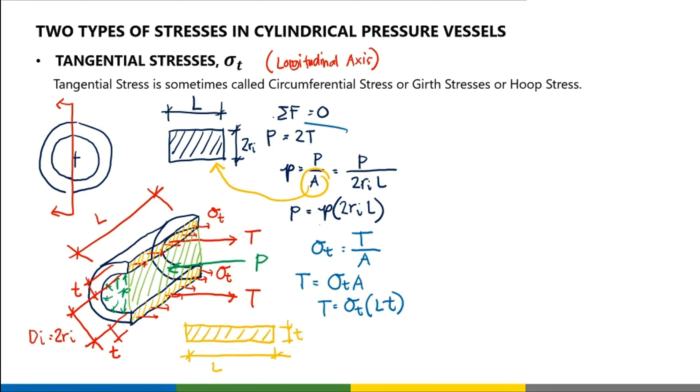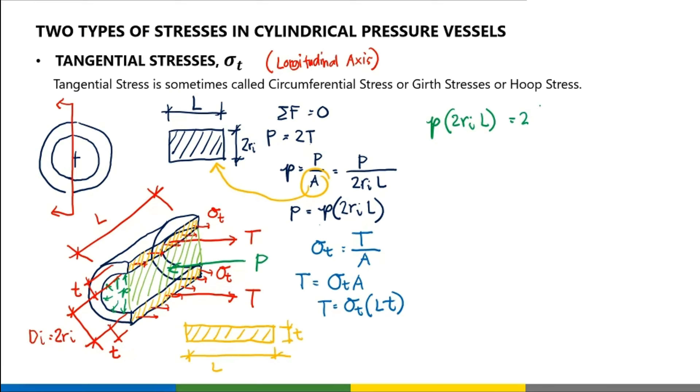So meron na tayong value ni T. So balik tayo dito. Summation forces, we can say that P is equal to twice ng T. Substitute natin yung value ni P, which is equal to pressure multiplied by 2Ri multiplied by length L, is equal to twice ng T, 2 multiplied by tangential stress multiplied by length times thickness.

So makakancel yung 2, makakancel yung length L, at ang natira na lang ay yung tangential stress at yung thickness dito. Ilipat natin yung thickness sa kabila. We can say that tangential stress is equal to internal pressure, may natirang inner radius doon, inner radius divided by T. So that is now our formula in getting our tangential stress.

Where small letter P is the internal pressure sa ating tank, yung ating Ri, that is the inner radius, at yung T is the vessel thickness. So yan ngayon yung formula natin in getting our tangential stress doon sa ating cylindrical pressure vessel na nag-fail doon sa ating longitudinal axis.

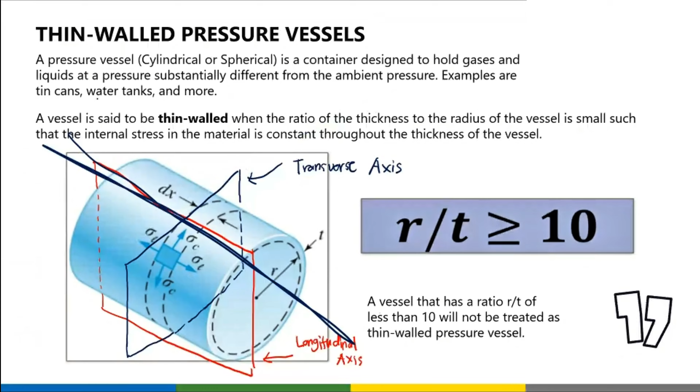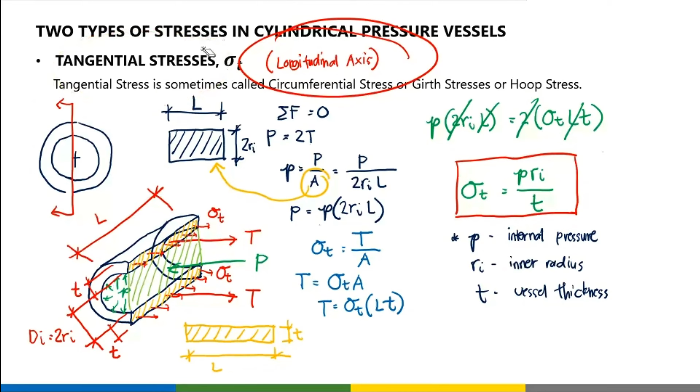Sabi natin pwedeng mag-fail yung ating cylindrical pressure vessel in longitudinal axis at pwede rin sa ating transverse axis. Sa ating transverse axis, ang present na stress doon ay tinatawag nating longitudinal stress. Hindi ibig sabihin, huwag kayong malilito guys, kapag sa longitudinal axis ang napoproduce na stress ay tangential stress. Magkaiba yung longitudinal axis sa longitudinal stress. Dito sa ating longitudinal stress, nag-fail siya sa ating transverse axis, kaya ito ay longitudinal stress.

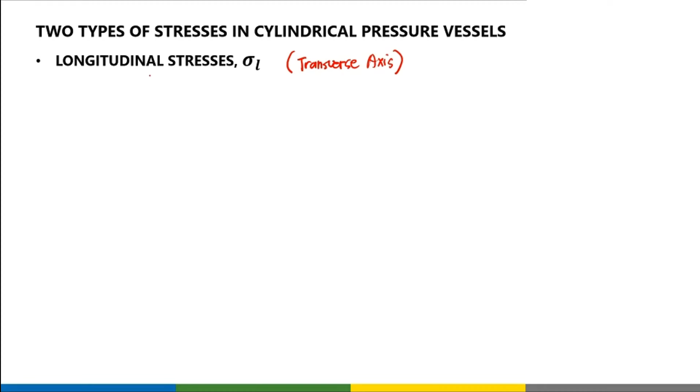Paano naman nangyari yon? Sabi natin, di ba, pwedeng mag-fail dito na part. So ganito naman nangyari yan.

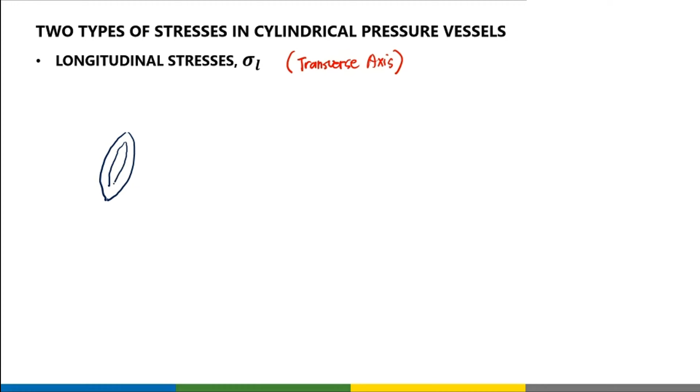Okay, so let's say ganito guys, yung nangyari sa ating pressure vessel, nagkaroon ng contact pressure dito banda, nagkaroon ng pressure dito sa part na to. Kung mapapansin nyo guys, nakadirect yung mga stresses natin sa ating longitudinal axis. So ibig sabihin, kaya tinawag nating longitudinal stress, which is nag-fail siya sa ating transverse axis.

So ito yung mga stresses, these are the longitudinal stresses. So yung area na i-consider natin ngayon ay itong area na to, yan, yung shaded part na yellow.

Okay, so kung meron tayong na-produce dyan na stress and meron tayong naapektuhan na area, may mapuproduce ulit tayong force. Tawagin natin to as force F.

Okay, next, meron tayong internal pressure ulit. Diba sabi natin meron tayong internal pressure sa loob ng tank, so yun yung ating small letter P. So makakapag-produce ulit tayo, so pwede ring mag-fail.

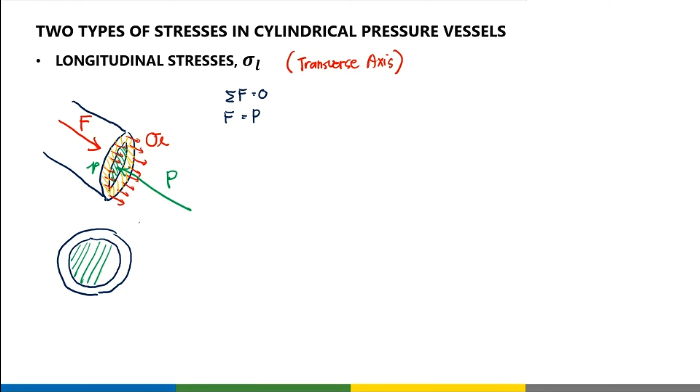Yung nasa loob, okay? So this is the diameter, or twice ng inner radius. Okay, so kung kukunin natin yung area niyan, diba ito lang yun naman, yung shaded part naman nasa loob. So we can say that area ng circle in terms of radius, that is pi r squared.

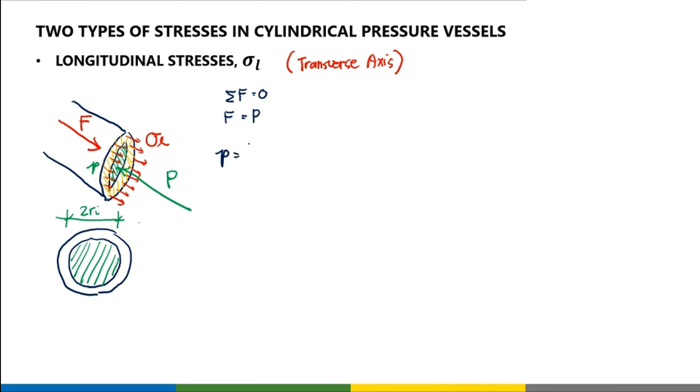Okay, so internal pressure, P equal to P divided by area. Yung area na i-consider natin ay yung shaded part na nasa loob. Substitute natin, P divided by pi r squared in terms of radius na lang guys. Pi r squared. So cross multiply natin, we can say that force P is equal to internal pressure multiplied by pi r squared. So meron na tayong force P.

Kunin naman natin yung force F. Force F is caused by our longitudinal stress. So kung titingnan din naman natin yung naapektuhang area dito sa ating longitudinal stress ay ito. Kung i-cut natin to ulit, ilatag natin, so magiging parang rectangle ulit siya. So ganito siya.

So this is the thickness of our pressure vessel, ito guys. That is the thickness. Ano naman yung base natin dito? Yung base natin dito, yun yung circumference ng ating circle, that is in terms of radius, that is 2 pi r, or in terms of diameter, that is pi d. So radius na lang yung gamitin natin. Ito yung area na i-consider natin.

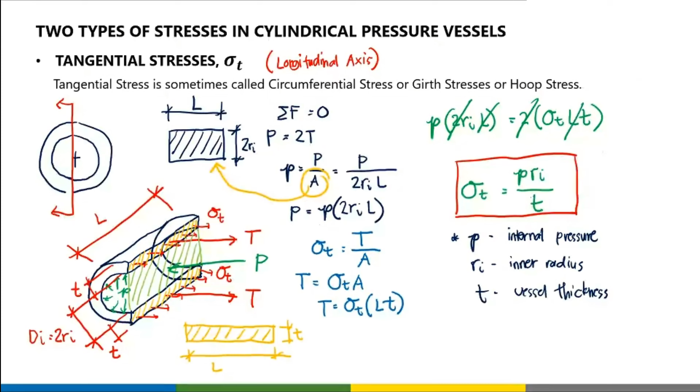Okay, so this is our formula in getting our stresses in cylindrical pressure vessels. Kung mapapansin nyo guys, yung longitudinal stress natin ay may 2, sa tangential naman wala. So ibig sabihin, yung relationship ng longitudinal and tangential stress, kung nagkaroon lang ng 2 dito sa tangential stress nung kinukuha natin yung longitudinal stress, we can say that longitudinal stress is just half ng tangential stress. Or cross-multiply natin, we can say that tangential stress is equal to twice ng longitudinal stress. Given that equation, we can say that tangential stress is greater than longitudinal stress.

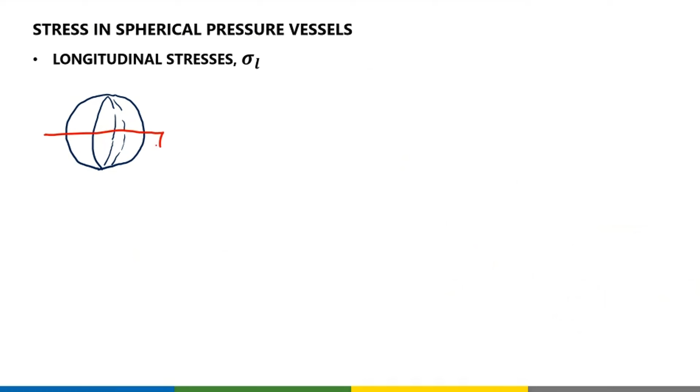Okay, paano naman sa ating spherical pressure vessel? Isa lang yung way na pwede siyang mag-fail kasi anywhere, or kahit anong direction, same lang din naman yung mapapalabas natin na stress sa ating sphere, if this is our sphere. So yung sphere natin pwedeng mag-fail sa ganitong direction, ganitong direction, ganitong direction. So i-try nating i-consider yung ganitong part. Same lang din guys, kasi sphere naman yan, anywhere magiging circle din lang. So nag-fail siya pa ganyan, ganito naman nangyari sa kanya.

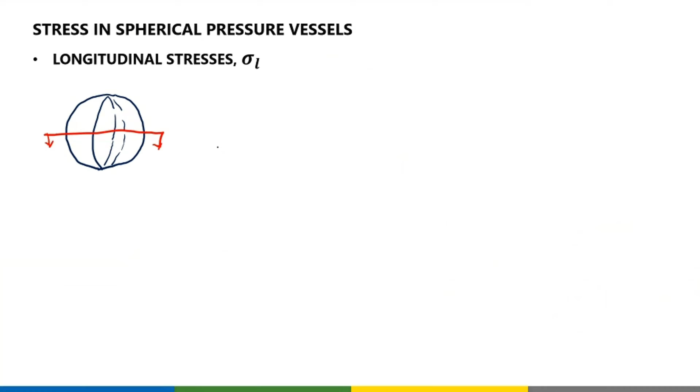Okay, so let's say ganyan yung pagkakahati, so we have stresses ulit dito. Ito ngayon yung tinatawag nating longitudinal stresses, and nag-occur yan dito sa part na to, sa shaded part na yellow.

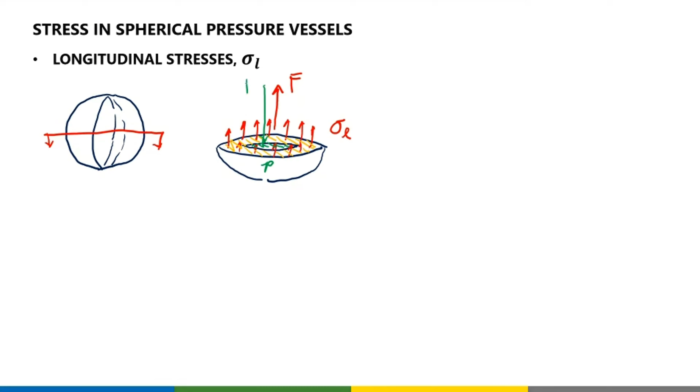So kung meron tayong na-produce na stress and meron tayong affected area, meron tayong produce na force T, or let's say sabihin natin force F na lang. And meron ulit, meron tayong internal pressure sa loob ng pressure vessel, so meron ulit tayong mapuproduce na force caused by our internal pressure, tawagin natin to as force P ulit. Okay, so summation forces ulit, we can say that force P is equal to force F. So dito muna tayo sa force F that is caused by the longitudinal stress.

So parang ganun lang sa longitudinal stress natin sa ating cylindrical pressure vessel. Mag-cut ulit tayo dito, ilatag natin yan, magiging ganito yung itsura niya. Diba meron pa rin tayong thickness? May thickness pa rin tayo. So that is the thickness of our area of our sphere. Yung base niya ngayon, that is the circumference of our circle, that is 2 pi inner radius. Okay, so yung area na i-consider natin sa longitudinal stress ay ito ulit.

Sabi natin, longitudinal stress is equal to force F divided by area. Substitute natin yung area, that is 2 pi inner radius multiplied by thickness. So cross-multiply natin, we can say that F is equal now to longitudinal stress multiplied by 2 pi Ri times thickness. Okay, so meron na tayong force F. Ano naman yung force P natin?

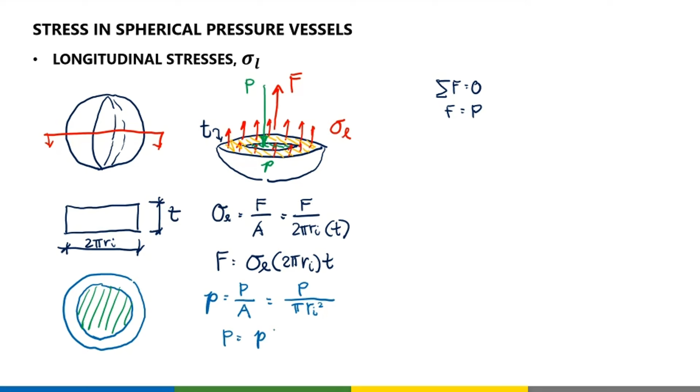Just like in our cylinder, ganun din guys, ito pa rin yung area na i-consider natin, yung inner area, itong area na to. Okay, so force P that is caused by the internal pressure. Internal pressure is equal now to force P divided by area, substitute natin yung area, pi R squared na lang guys. So force P will now be equal to pressure multiplied by pi Ri squared.

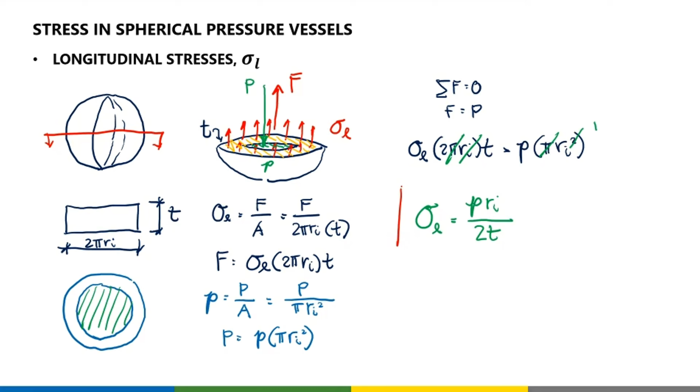Okay, meron na tayong force F, meron na tayong force P. Then we can now substitute that in our F is equal to P. So yung F natin ay longitudinal stress multiplied by 2 pi Ri multiplied by thickness. Then yung P natin ngayon ay internal pressure multiplied by pi multiplied by Ri squared. Mapapansin ninyo, cancelled yung pi, cancelled yung isang inner radius, may natirang isa dito. So yung formula natin, longitudinal stress, ilipat natin yung 2t sa kabila, meron tayong formula na longitudinal stress is equal now to internal pressure multiplied by inner radius divided by 2t. And that will be our formula in terms of longitudinal stress sa ating spherical pressure vessel.

So mapapansin nyo, same lang yung formula natin dito sa longitudinal stress in terms of cylindrical pressure vessel. Okay, this is still PRi over 2T, where P is the internal pressure, Ri is the inner radius, and T is the vessel thickness.

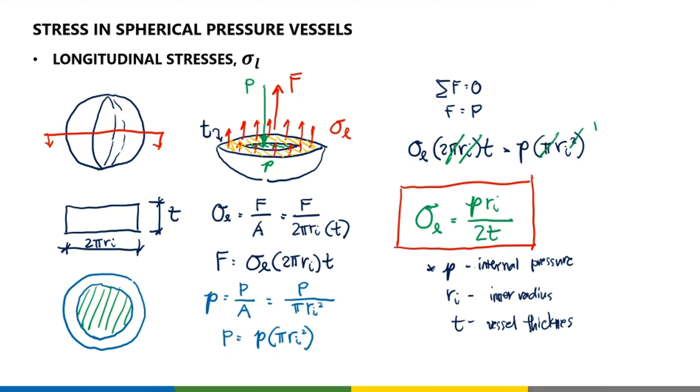Okay, so i-apply na natin yan ngayon sa ating problem. For our first problem: a cylindrical steel pressure vessel has hemispherical end caps. The inner radius of the vessel is 24 inches and the wall thickness is constant at 0.25 inch. When the vessel is pressurized to 125 PSI, determine the stresses in the cylinder. So pinapahanap yung stresses dito sa ating cylindrical pressure vessel.

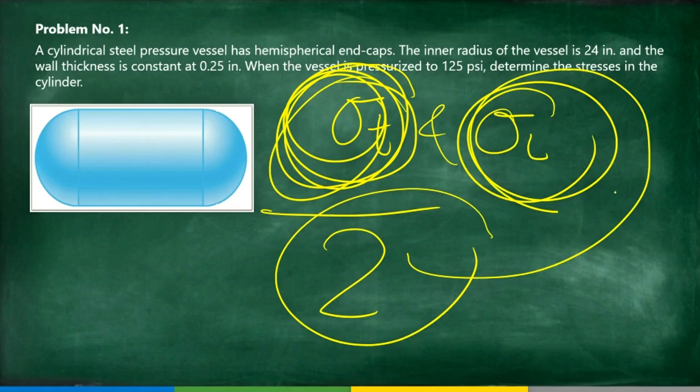Sabi natin kanina sa cylindrical pressure vessel, dalawa yung present na stresses natin doon, namely tangential stress and longitudinal stress. And sabi din natin kanina na yung longitudinal stress ay just half ng tangential stress. So therefore, pwede na lang nating isolve yung tangential stress and later on, i-divide natin sa 2, makukuha na natin yung longitudinal stress. Okay, so kunin natin ngayon yung tangential stress. Sabi natin, tangential stress is equal to PR over T.

PRi over T. Okay, let's put our given values. We have inner radius which is equal to 24 inches, wall thickness that is 0.25 inch, and our internal pressure that is equal to 125 PSI. We need to find the tangential and longitudinal stress.

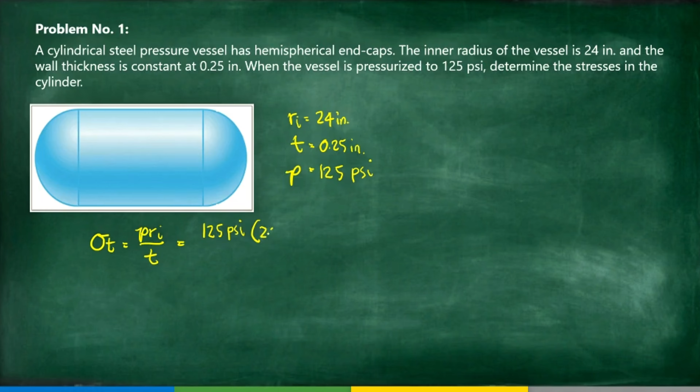Let's get first our tangential stress and later on divide it by 2 to get our longitudinal stress. Substitute the internal pressure that is 125 PSI, our inner radius that is 24 inches, and our thickness that is 0.25 inch. Cancel the inches, and therefore our tangential stress will now be equal to...

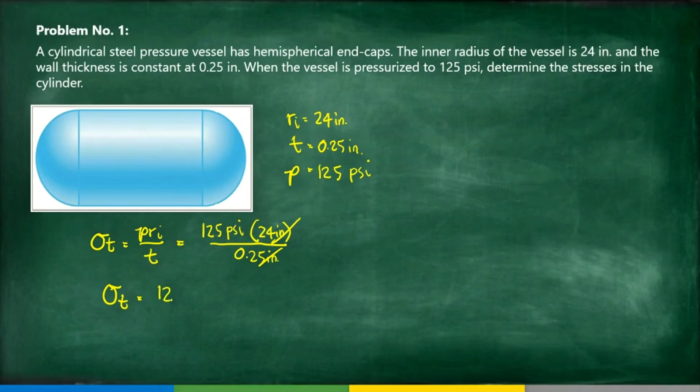And this is now our answer.

Okay, we said earlier that longitudinal stress is just half of our tangential stress. So let's get this, substitute our tangential stress. So tangential stress is 12,000 divided by 2. Therefore, our longitudinal stress will now be equal to 6,000. So it's that easy.

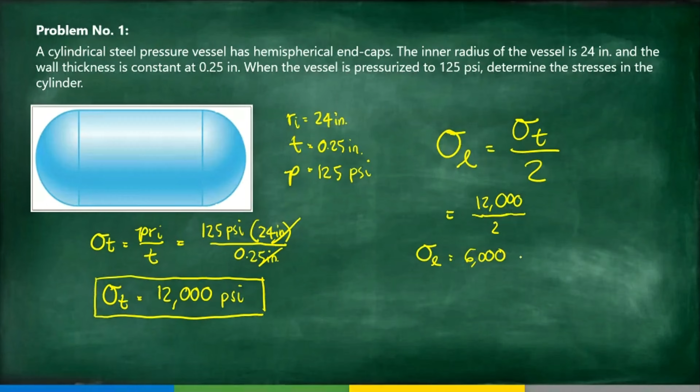Longitudinal stress is 6,000 PSI. Let's have another example.

The scuba tank has a cylindrical body and a spherical end cap, each of 7.5 inches outer diameter. The wall thickness of the tank is 0.5 inch. The tank is made of an aluminum alloy which has an ultimate tensile strength of 56 kilopound per square inch. Determine the factor of safety against bursting when the tank is pressurized to 3,000 psi.

What we need to find is the factor of safety. To find the factor of safety, we have the given formula: ultimate strength or ultimate stress divided by maximum actual stress. Our ultimate strength, we already have it given, the ultimate tensile strength that is 56 KSI. That has already been determined through different laboratory tests, so we can say there's nothing else we need to do there - that is the strength of our scuba tank.

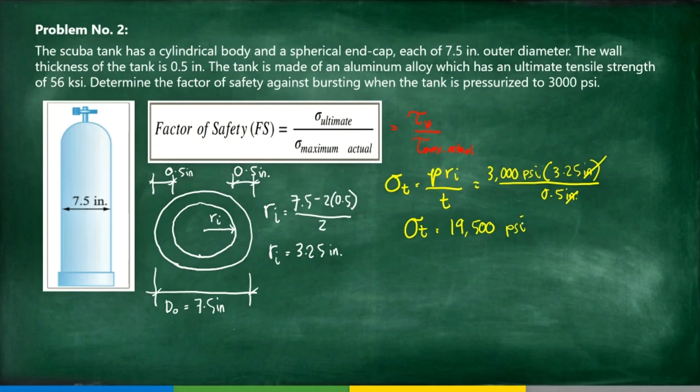Sabi natin na tangential stress nakaka-experience ng maximum stresses and therefore this will be our maximum actual stress. Kung meron na tayong maximum actual, meron na rin tayong ultimate and therefore we can now compute for our factor of safety.

Guys, para masabi natin na yung scuba tank or yung material natin, in general, ay safe, dapat yung factor of safety natin should be greater than 1 para masabi nating safe tayo. Less than 1, ibig sabihin mag-fail na yung ating material. Kapag nag-equal to 1, we are endangered na, konti na lang mag-fail na. So dapat ang goal natin, mapalabas natin na yung factor of safety should be greater than 1 para masabi natin na safe yung ating scuba tank.

Okay, isolve natin yung ating factor of safety. Factor of safety is equal to ultimate divided by maximum actual. Pero guys, yung given natin for ultimate tensile strength ay in terms of KSI, that is kilopound per square inches. And yung ating maximum actual is in terms of pound per square inches. Alam natin na in 1 kilopound, there are 1,000 pound, so pwede nating i-convert yung KSI into PSI by multiplying 1,000, or pwede ring PSI into KSI. So i-convert natin yung KSI into PSI: 56 KSI in terms of pound per square inches, i-times lang natin sa 1,000, so that will be equal to 56,000 PSI na.

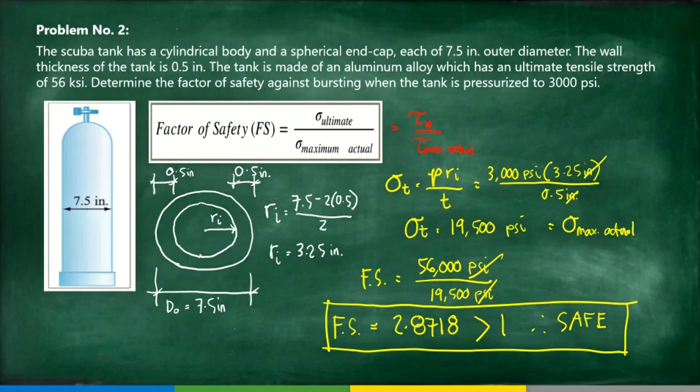Okay, another example for our pressure vessel: a water tank that is 8 meters in diameter and 12 meters high. If the tank is to be completely filled with water, determine the minimum thickness of the tank planting if the stress is limited to 40 megapascal.

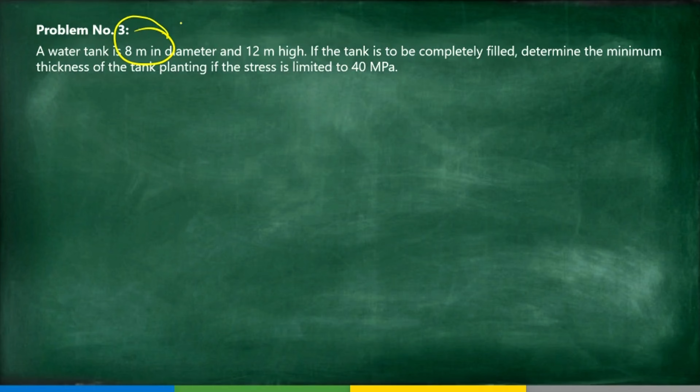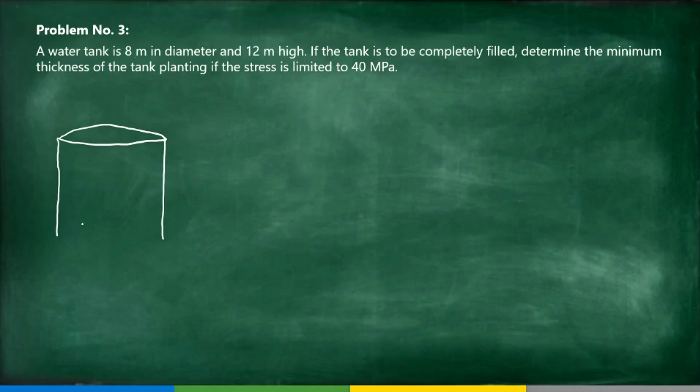Okay, meron tayo ditong 8 meters in diameter. We do not know if that is inner diameter or outer diameter. Kung hindi sinabi whether that is inner or outer diameter, always assume na yung given ay inner diameter. So ganito yung nangyari sa atin: meron daw tayong water tank that is 8 meters inner diameter and 12 meters high. Hindi sinabi guys, no, either inner or outer, always assume that is inner diameter, 8 meters.

Okay, so yan yung ating water tank. Meron daw tayong inner diameter which is equal to 8 meters. Meron tayong thickness dito, T. Ang dinidesign daw natin ay kailangan nating malaman yung minimum thickness. That is 12 meters high. And meron tayong limited stress or the working stress that is equal to 40 megapascal, or that is also maximum stress that is 40 megapascal. I-design daw natin yung tank, o kailangan nating malaman kung ano yung pinakamanipis na thickness na pwedeng i-cater o pwedeng maging property ng ating tank, which is safe pa rin tayo guys.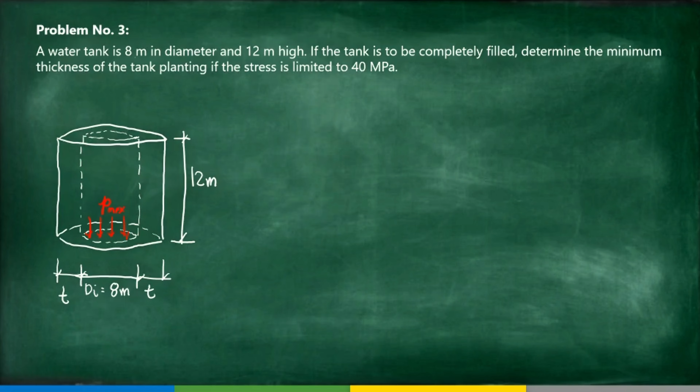So therefore, dito sa ating water tank, kung i-consider natin yung maximum pressure natin ay matatagpuan sa pinakamababang parte ng ating tank. Okay?

So para makuha natin yung pressure, meron tayong formula. I will give you formula para mahanap yung ating pressure. That is pressure is equal to unit weight ng liquid, unit weight or specific weight ng liquid multiplied by height. Okay? So yan yung ating formula for pressure. Unit weight ng liquid, kung ano yung present dito, and yung height ay always measured from the liquid surface.

Kung i-consider natin yung maximum pressure dito, maximum pressure ay equal to unit weight ng kung ano yung liquid dito, that is unit weight ng water, kasi water nga yung laman ng ating tank. And ano naman yung height na i-consider natin? Yung height ay always measured from the liquid surface. Sabi natin na yung tank ay completely filled. So andito ngayon yung liquid surface natin papunta dito. So yung height na i-consider natin ay 12 meters.

What if, tinanong ko sa inyo, what is the maximum pressure kung meron tayong tank na hindi completely filled. So this is our big H, this is our small h. Pinapahanap sa atin yung maximum pressure. Maximum pressure is unit weight multiplied by H. Unit weight is kung ano yung liquid dito. And yung height na i-consider natin, sabi natin, always measured from our liquid surface. Therefore, hindi natin i-consider yung big H kasi wala namang liquid dyan. Kaya ang i-consider natin ay mag-start tayo dito sa bandang liquid surface papunta sa pinakamababang parte na i-consider natin. So that is small letter h, hindi big letter H.

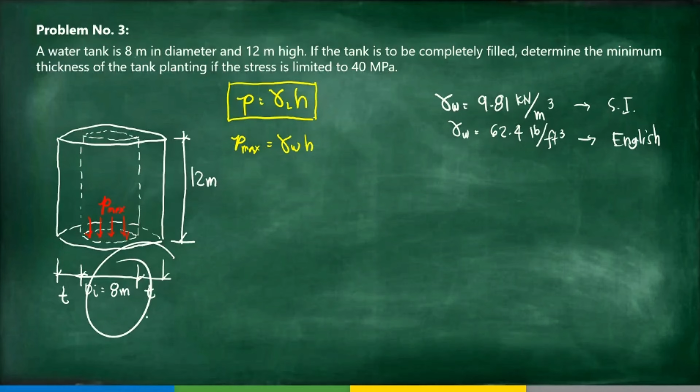Okay? So dahil in terms of SI tayo kasi yung magamit natin ay in terms of meters and Newton and megapascal, that is in System International, okay? So kung System International yung ginagamit natin or SI, gamitin natin na value ni unit weight ng water that is equal to 9.81 kilonewton per cubic meter.

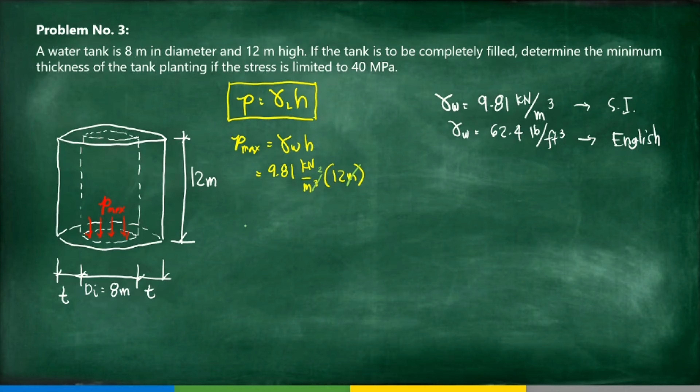So kunin natin yung ating maximum pressure. Maximum pressure, that is unit weight ng water, 9.81 kilonewton per cubic meter, and yung height na i-consider natin ngayon ay 12 meters. Okay? So cancel yung isang meter, so may natirang dalawa na lang dito, guys. So therefore, our maximum pressure will now be equal to 117.72 kilonewton per square meter.

So this is actually kilopascal. Pero ang gusto natin in terms of megapascal para uniform yung ating unit. So i-convert natin tong kilopascal into megapascal. 117.72 kilonewton per square meter. Sabi natin in 1 kilonewton there are 1,000 newtons. And in 1 meter, guys, kung nasa taas kung nasa numerator yung kailangan nating i-cancel, dapat yung i-multiply natin nasa denominator siya para ma-cancel sila, guys. So in 1 meter, there are 1,000 millimeters.

So dahil naka-square to, i-square din natin to. So makakancel yung kilonewton, makakancel na rin yung square meter, magiging square millimeter. So ang matitira na lang ay Newton per square millimeter. And therefore, our maximum pressure in terms of megapascal ay equal to, that will be equal to 0.11772 megapascal or Newton per square millimeter or megapascal. Okay? Meron na tayong maximum pressure.

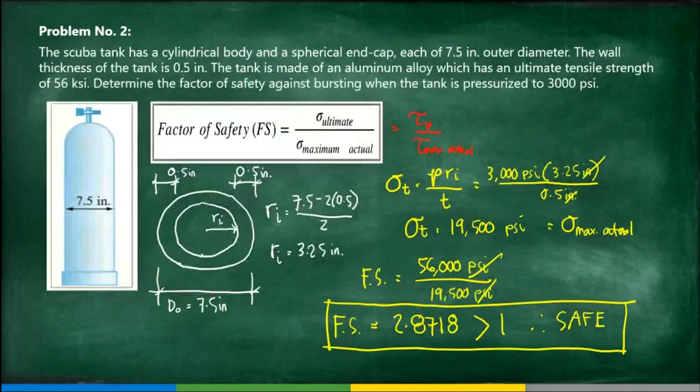Okay? Sabi natin na yung tank ay nakaka-experience ng tangential and longitudinal stress and therefore sa ating tangential may maibibigay siyang thickness and sa longitudinal meron din siyang pwedeng ibigay na thickness. Okay? So, okay, so wala pala. Dito kailangan nating malaman kung ano yung ibibigay na thickness ni tangential stress and yung ibibigay din ni longitudinal stress na thickness and therefore kung ano yung mag-govern doon, yun yung pipiliin natin as our minimum thickness. Okay? So kunin natin yung ating thickness given by tangential and longitudinal stress.

So yung ating 40 megapascal, substitute natin sa tangential and longitudinal. Maibibigay silang thickness na dalawa. Okay? So dito muna tayo sa ating tangential stress.

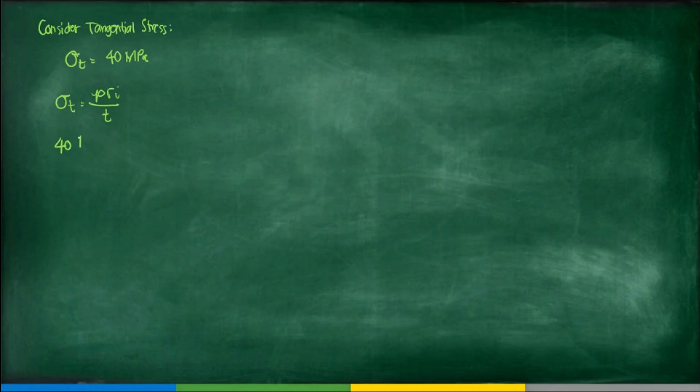So, equate natin na yung tangential stress natin ay equal to 40 megapascal. Formula natin for tangential stress, p r i over t. Substitute natin yung given natin, 40 megapascal. And yung maximum pressure natin, 0.11772 megapascal. 0.11772 megapascal. And yung inner radius natin,

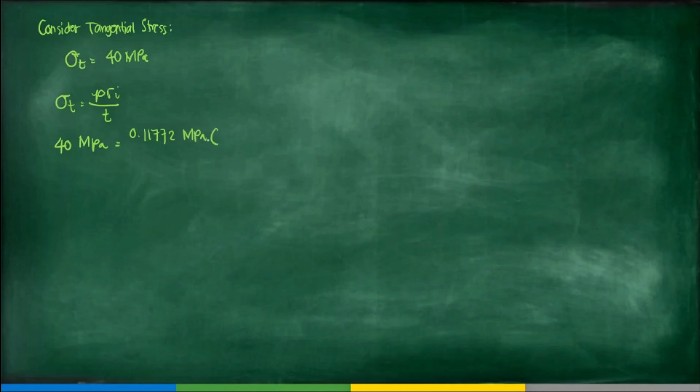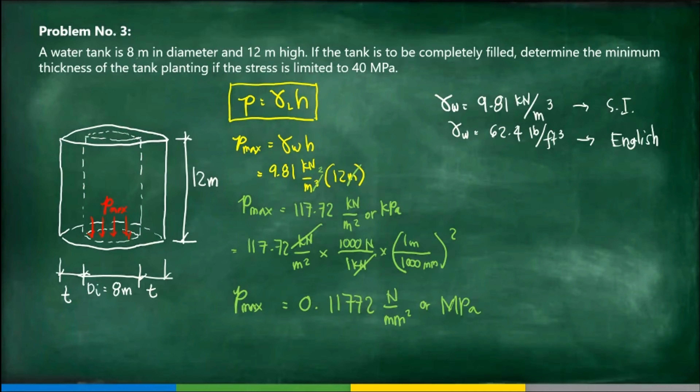Meron tayong inner diameter dito guys. Sabi natin na inner diameter ay twice ng ating inner radius. So para makuha natin yung inner radius, 8 divided by 2 or 4 meters. In terms of millimeters, magiging 4,000 millimeters na yung ating inner radius. 4,000 millimeters. Okay, divided by thickness. Cancel yung MPa, so meron tayong value na T in terms of tangential stress will now be equal to 11.772.

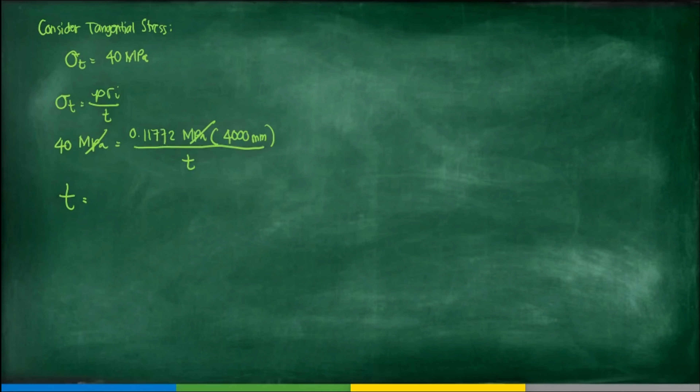So kung meron tayong 11.772 millimeters, ibig sabihin sa ating tangential stress, ang pinakamanipis na thickness na kaya niyang i-cater ay hanggang 11.772 na lang. Mas mababa ba dyan, mag-fail na yung ating material in terms of tangential stress and ayaw nating mangyari yon. So dapat hindi na tayo bababa sa 11.772.

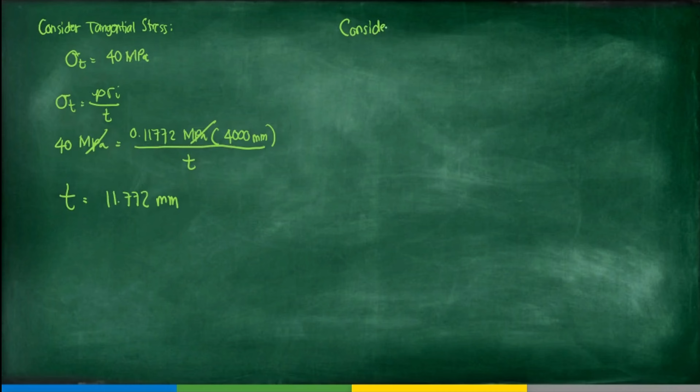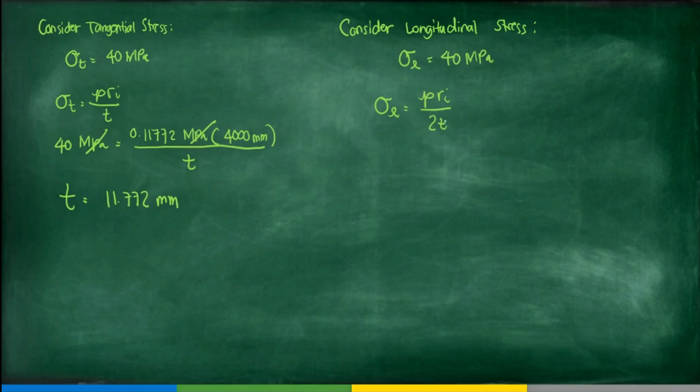Consider naman natin yung ating longitudinal stress. So for our longitudinal stress, i-equate ulit natin na yung longitudinal stress ay equal to 40 megapascal. Formula natin for longitudinal stress ay pri over 2T. Substitute natin 40 MPa. Yung ating internal pressure or maximum pressure is 0.11772 MPa. And yung inner radius natin ay 4,000 millimeters, I should say, divided by 2T. So cancel yung MPa.

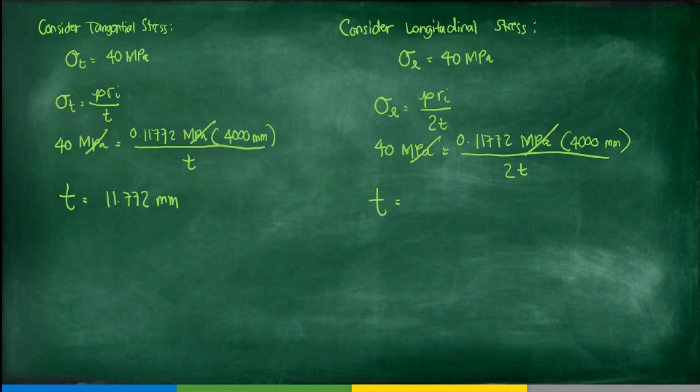So T will now be equal to 5.886 millimeters. Okay. Sa ating longitudinal stress, ang pinakamanipis pa lang kaya niyang i-cater ay hanggang 5.886. Mas mababa pa sa 5.886, bibigay na yung ating tank sa ating longitudinal stress.

Okay? Or doon sa ating transverse axis. Pero, kung i-consider natin as a whole, kasi iisang material lang naman ito, dapat kailangan nating mamili kung ano yung ating minimum thickness. Sabi natin kanina sa tangential stress, ito yung kanyang minimum thickness. Kung pipiliin natin tong 5.886 as our minimum thickness, safe tayo sa longitudinal stress. Kaso, mas mababa tayo sa tangential stress. And sabi natin hanggang 11.772 na lang yung kakayahan ni tangential stress. Ibig sabihin kapag pinili natin tong 5.886, bibigay na tayo sa ating tangential stress and therefore ayaw nating mangyari yon, kaya hindi natin pipiliin yung 5.886 and therefore our minimum thickness will now be equal to

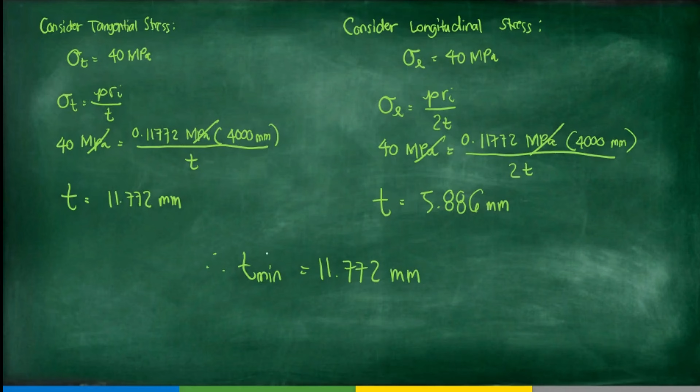11.772 kasi safe siya sa tangential stress as well as safe pa rin tayo sa longitudinal stress kasi hindi pa natin namimit yung pinakamanipis na thickness ni longitudinal stress. Therefore, our minimum thickness will now be equal to 11.772 millimeters. And this will be our answer. Okay? So yan na ngayon yung ating sagot.

Kung mapapansin nyo guys, kung maalala nyo yung logic natin from our discussion, from our previous discussions, kung ang pinipili natin ay minimum or kung ang pinipili natin ay maximum, ang hinahanap natin, kung ang hinahanap natin ay maximum, di ba ang pinipili natin ay least value? Okay? So therefore, kung ang pipiliin naman natin ay maximum or minimum, minimum, kung ang hinahanap natin ay minimum value, ang pipiliin natin ngayon ay the greater value. Okay? Tama nga naman, no? Kasi ang hinahanap natin ay minimum.

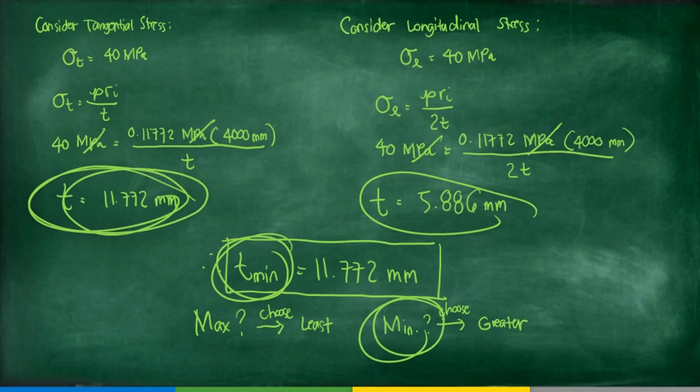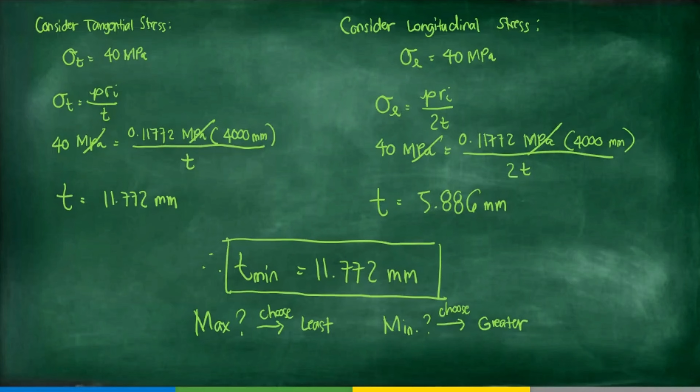Pero kung i-compare natin to sa kabila, sa dalawang thickness, ang pinili natin ay yung mas malaki, yung greater value. Okay, so mamaya, later on, kung ang pinapahanap sa atin ay maximum value, so piliin na lang para natin yung ating least value without any explanation. Kasi nga, napatunayan natin na kapag maximum ang tinatanong, least yung nag-govern. And kapag minimum naman yung tinatanong, greater value yung nag-govern. Okay? So maintindihan niyo na guys, no? Later on, gamitan na lang natin ng logic. Okay, so that is the last example in terms of thin-walled pressure vessels.